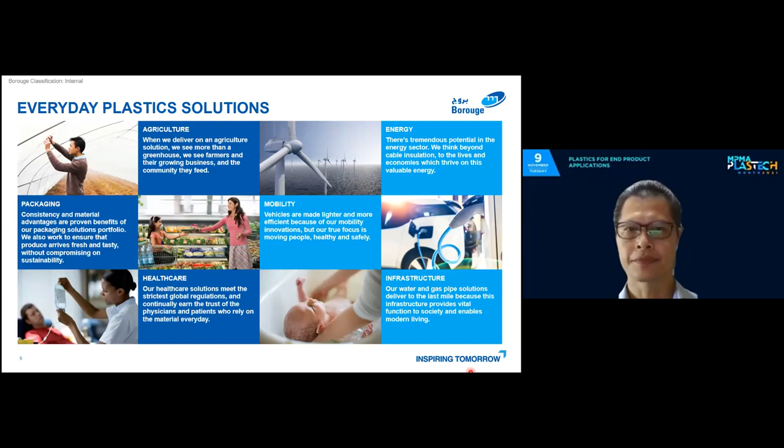For infrastructure, our business is divided into three subsections. Utilities, focusing on pressure, water, and gas. Construction, focusing on plumbing pipes for indoor application, and also soil and wastewater discharge, water harvesting facilities, as well as geomembrane for landfill and mining applications.

For industrial, it's typically larger diameter relating to refinery or oil and gas, with large diameter for seawater intake and outfall. These are steel pipes coated with polyethylene for transportation of oil and gas medium.

BorSafe is a family of pipe materials that we have. This is for pressure application - we have black as well as colored, ranging from medium density to high density. Today we focus on this PE100 thick wall application. This grade is designed for industrial, mining, and nuclear applications that require thick wall, large diameter pipe.

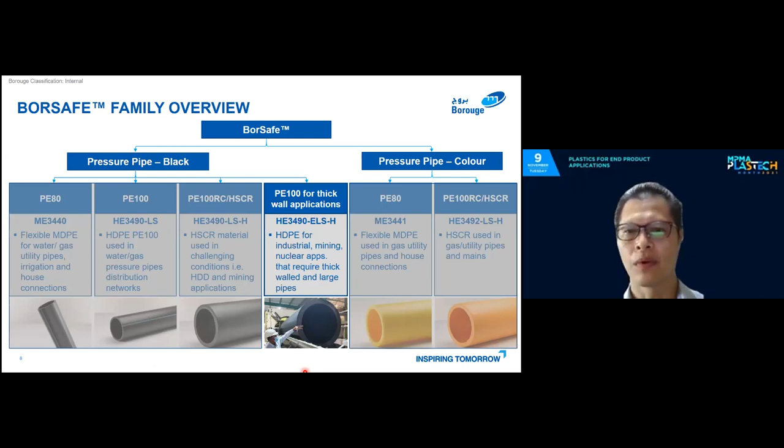What is large diameter? We are looking at more than 1200 mm, or thickness SDR 7 to SDR 9. This could amount to more than 95 mm wall thickness, so it could be PN 25 or less.

This is mostly for industrial use, because we are using this for water treatment and supply for mining, water transmission pipelines, and seawater intake and outfall for thermal plants, desalination plants, as well as nuclear plants. Because this pipeline is launched into the sea, flexibility is required during service.

All these projects are based on large project requirements, because you don't build refineries every day. This demand is also determined by local production capability - if it's possible to make locally, it will be much lower cost compared to shipping from another country. Maximum wall thickness of PE pipe that can be produced depends on combined factors such as machine and production capability, material property, as well as skill of the operators.

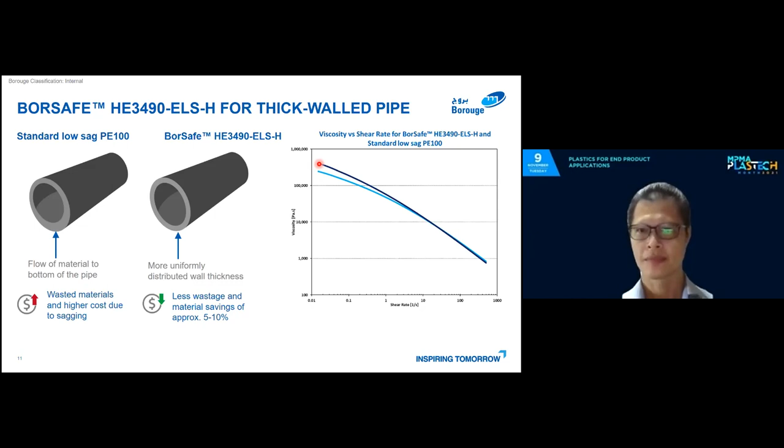Here is a trial that was done in the Middle East, with a size of 1600 mm, SDR of 17. According to ISO 4427, the wall thickness tolerance will be around 94.8 to 103.7 mm. With the standard PE100, after extrusion, you can see the wall thickness at the 4 to 7 o'clock position is already outside the tolerance prescribed in ISO 4427, more than 103.7 mm.

Under the same conditions, this ELS material has been extruded, and you can see that the wall thickness at 4 to 7 o'clock is less than 103 mm - it does not exceed the maximum tolerance provided in ISO 4427. Of course, you can see that some of them are still outside the range, less than 94.8. But achieving 94.8 is easier than having a high thickness and trying to reduce it to a smaller wall thickness.

So much for this introduction of this material. Look at this comparison of properties.

RCP is the rapid crack propagation. This is a property of the pipe when subject to high impact. The pipe will crack, so this material needs to withstand crack propagation and arrest it before it progresses further. It has the same performance as the standard PE100.

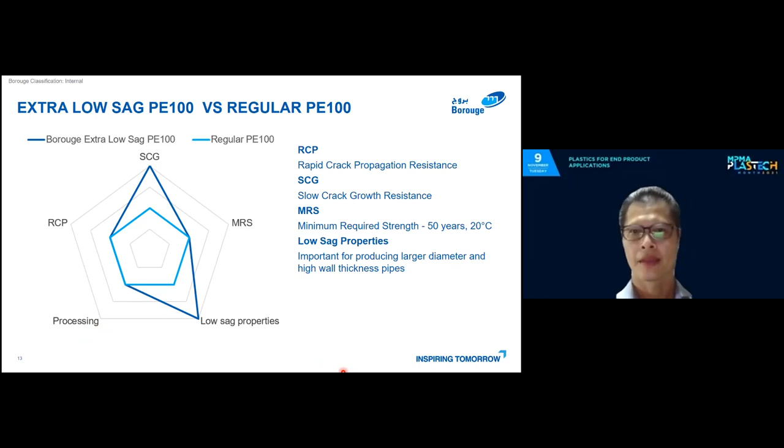Here is a schematic of grade recommendations for the sizes required. If we need 60 to 70 mm wall thickness, our standard PE100 3490 LS would be suitable. For anything more than 70 to 90, I would recommend LSH material. For anything more than 95 mm, the best in class would be ELSH.

This grade is made of bimodal technology with hexene monomer. The ease of processability, in addition to resistance of sagging, is through this improved viscosity MFR we have seen, with a more than 0.15 provision given in ISO 4427.

Again, I must stress that wall thickness capability changes per local production capability. That means if your machines locally are able to make this size, coupled with the raw material used and operator skill, a good large diameter thick wall pipe can be achieved.

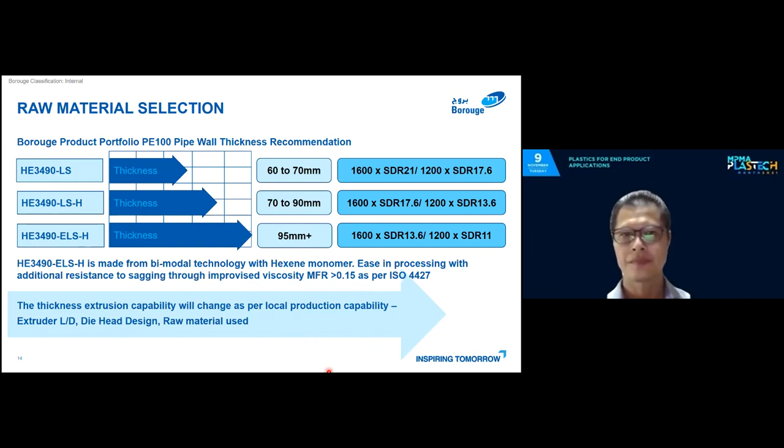Here we share some success stories. This is a success story in Egypt. The pipe manufacturer is Gulf Manufacturing Company, with a few projects: New Capital, port industrial, some desal plants, as well as irrigation waterworks. Pipe sizes range from 900 mm to 1600 mm, SDR 11 to 17, about thickness 81 to 94 mm.

The challenge was to find a PE100 material that allows production of this thick wall pipe in even wall thickness. With ELSH, they were able to realize the pipe dimension as well as a saving of 5 to 10% in material costs. There are some project photos for reference.

Next is Myanmar, in a copper mine. This application for pipe is for acid solvent transmission. As we know, mining requires a lot of acid to wash away material to extract whatever you want from the mine.

The pipe is produced by Chinaust, size 800 mm, SDR 11, about 74 mm thick. What they require is corrosion resistance against acid solvent, and PE100 is good against this kind of chemical resistance.

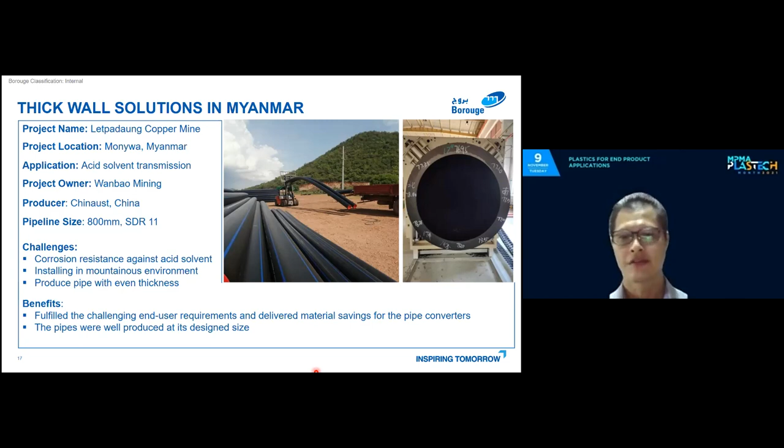The last example is in Vietnam. The producer is Thien Phong Plastic, in a province in the southeast of Ho Chi Minh City. The purpose is for seawater transportation into prawn farms.

Pipe sizes were 1200 to 1600 mm, SDR 11 to 17, wall thickness ranging from about 94 to 109 mm. What they need is a suitable PE100 material that can be made into even wall thickness, as well as corrosion resistance to seawater.

They need large seawater volume transported through harsh installation conditions, going through sand dunes, under the river, and then to the prawn farm. This ELSH, a durable pipeline with minimum maintenance cost, is able to support their operation of the prawn farm.

All right. So much for all the examples as well as the material introduction. Here I conclude. Development of this material and pipe extrusion technology have driven production of even larger pipes. Currently, they're even as large as 3.5 meters. And the success of the large diameter pipes has been proven in industrial application, as you've seen above. And provided operational pressures are not too high, PE100 can be cost effective for large diameter water transmission pipe when whole life costings are taken into consideration, including the maintenance of this pipe or leakage management.

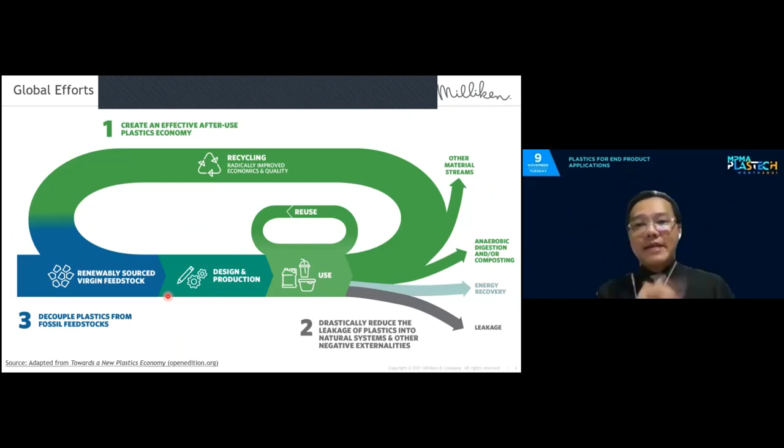If we step back on a macro level, this chart is common. This is the life cycle of plastics, especially packaging, but basically all plastics. It starts from production of the raw plastic pellets, then the design and molding of the final parts. This is where we are. We use and try to reuse as much as possible. Then at end of life, it either leaks away or we incinerate it, compost, and obviously we try to increase recycling. So these are the three main themes of sustainability in the polymer business. How can we increase recyclability and upcycling after use? Number two, how can we reduce leakage, whether to landfill or worse, to the water streams and the ocean?

And number three, how can we be decoupled from the fossil feedstocks? How can we use renewably sourced biomaterial? And these are the three main themes. But the theme of my talk today is really the often overlooked. What about the design and especially the production stage?

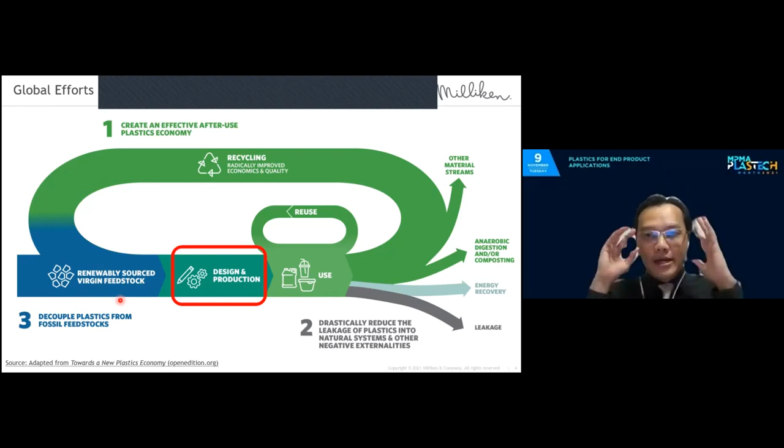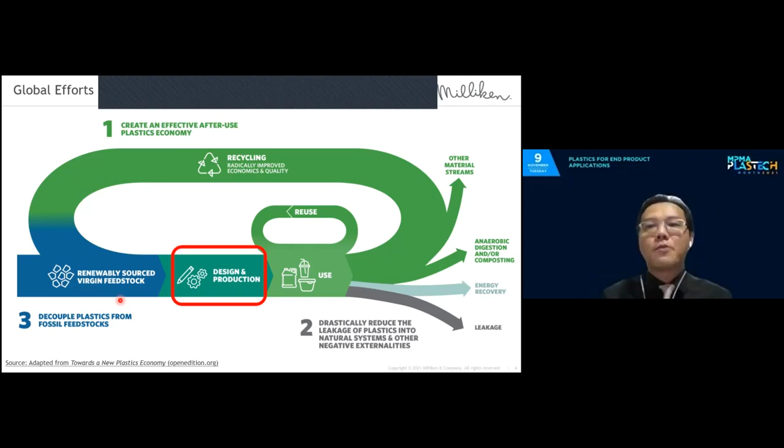And my talk will be about injection molding. What about optimizing the injection molding process to use as little energy as possible, to be as sustainable as possible? Sure, all of this needs to happen, but we do not forget small parts of the big cycle where we can also make an impact to increase the sustainability benefits.

So today we will be talking about three additive solutions from Milliken. Very quickly: our clarifying agent, Millad NX8000, our high-performance nucleating agent, Hyperform HPN, and also, like I mentioned, the very new DeltaMax impact modifiers. And let us look into it one by one.

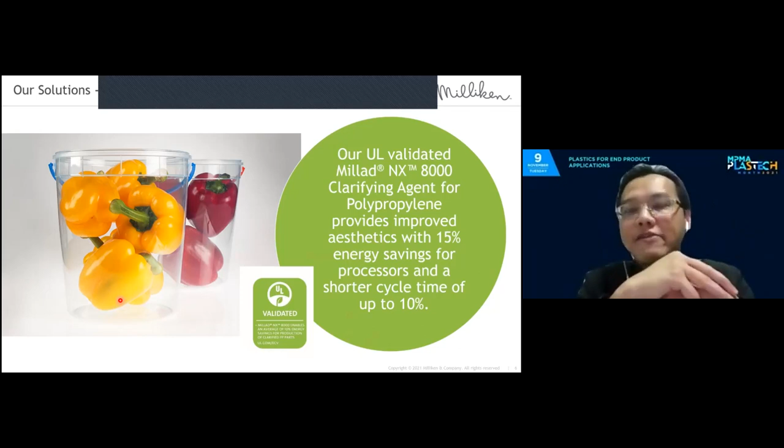NX8000, right? Right now, the most popular, most advanced clarifying agent for polypropylene, a lot of aesthetics improvement. But today we are really talking about how it can enable the optimization for the injection molders to save energy and to reduce the cycle time. So I have a 3-minute video, so please enjoy.

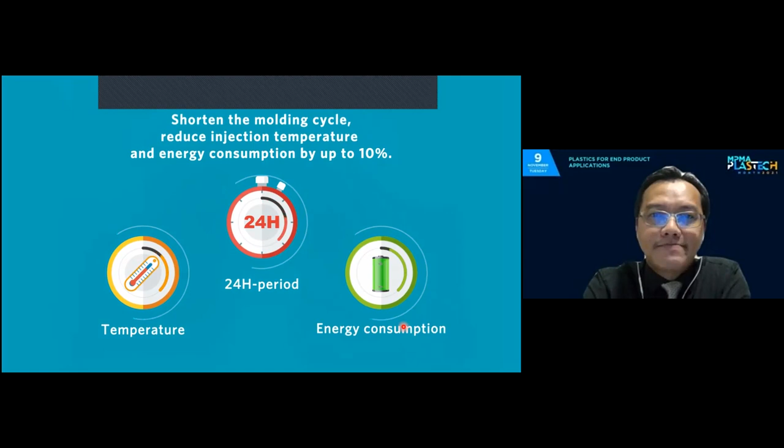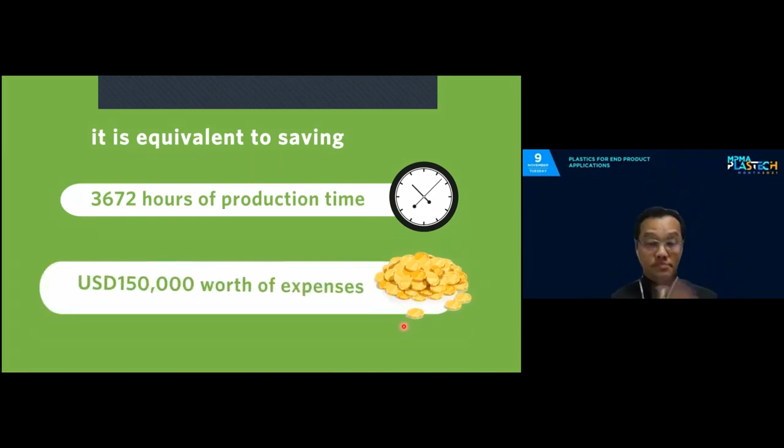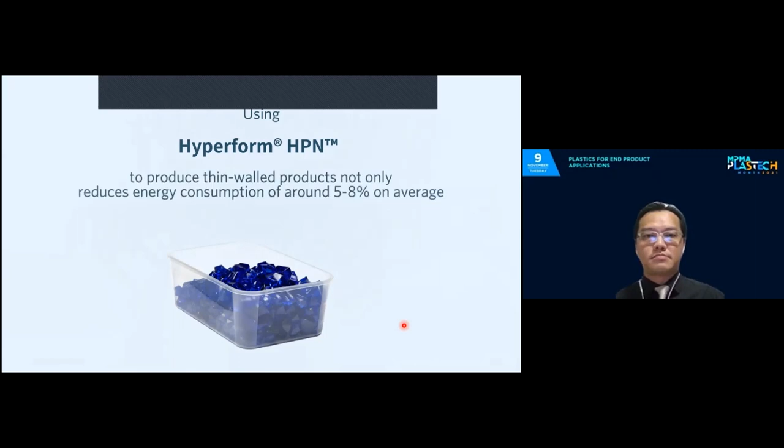Do you know? How to let PP be made at the source of production that is environmentally friendly, energy saving, and highly efficient is what we are constantly concerned about. Compared with traditional polypropylene clarifying agent, having Millad NX8000 clarifying agent in the injection molding process can effectively shorten the molding cycle, reduce injection temperature and energy consumption by up to 10%. Hyperform HPN not only has excellent energy-saving effects, but can even shorten the cycle time. Milliken products have been independently certified by UL. If we produce 1,000 tons of Millad NX8000 PP injection molding products, it is equivalent to saving 3,672 hours of production time, approximately $150,000, decreasing carbon dioxide emission by 11.8%. Similarly, Hyperform HPN for thin-walled products can reduce energy consumption around 5 to 8% on average. chemical.milliken.com.

Right. So I hope the video was clear enough, but let me quickly go through the technical fundamentals on how NX8000, the clarifier for polypropylene, enables this productivity increase. So traditional clarifiers, before NX8000 was introduced to the market maybe 10, 12 years ago, there was a dependency of haze, which is the optical performance, the transparency, versus the processing temperature or the injection melt temperature.

The traditional clarifiers have the drawback that they need high temperature to be able to work properly and therefore deliver the optical performance. If you try to reduce the processing temperature, reduce the heating to your extruder, then the parts will turn less and less transparent, and it does not meet the requirement, because the requirement of a clarified random copolymer is for the optical performance.

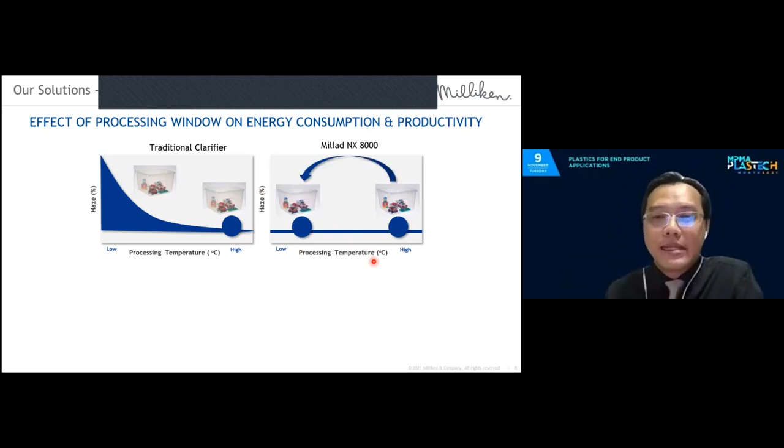But since we introduced Millad NX8000, it is insensitive, right? The haze, the optical performance is not sensitive to processing temperature. And therefore, whether you process it at a high temperature or a low temperature, it works fully, it functions properly. There is no degradation or there is no negative performance. And so we can translate that.

Traditionally, the industry used to have to process clarified random copolymer injection molding at high temperatures. And naturally, if you are molding it with high melt temperature, you would also need high cycle time. The hotter your melt, the more time you need to cool down in your mold before you can eject properly. And we try to symbolize the size of the bubble as a magnitude of the energy consumption used.

So by reducing the temperature, because now we do not have the roadblock, right? We do not have the bottleneck of needing high temperatures for the clarifying agent to work properly. Most of the time, we can also reduce the cycle time because, again, you are injecting a cooler melt. You now need less cooling in the mold before you can eject properly. And therefore, you can reduce both energy needed for heating of your extruder, as well as improve productivity, right?

Low cycle time, up to 10 to 15% productivity increase, which means that the energy needed to produce 1 kg or 1 part or 1 ton normalized will be even smaller. So productivity increase, faster outputs, more parts per machine, but also energy savings per part.

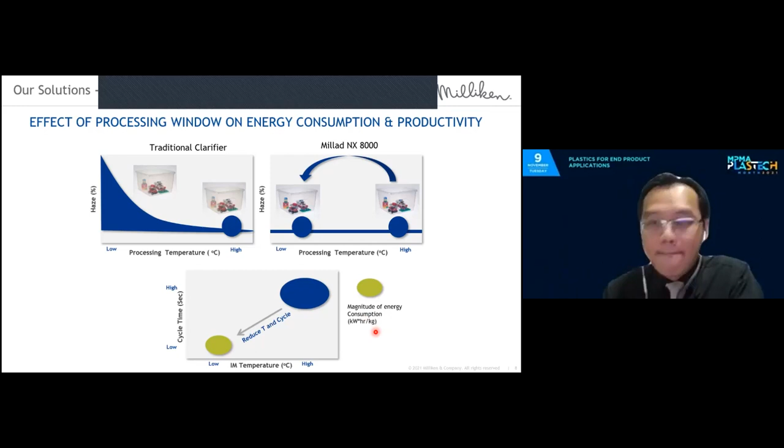Not just the overall haze or the overall transparency that you get the benefit from Millad NX8000, you also get less defects and no voids. Because if you try to use the traditional clarified random copolymer PP, especially when you try to reduce the injection temperature, like we say, it gets hazier, less transparent, and there is usually a higher risk and probability of defects, such as white streaks, white specks, and especially voids in certain parts of the plastics.

So voids are like, it's not an air bubble trap, but it looks like that, right? And especially now, a very close to home application of syringes in this COVID world, vaccination, voids in a syringe body are a no-no, right? To let the nurses and the doctors have full confidence that they are injecting it properly. You do not want them to mix up defects in the syringe barrel with air bubbles trapped in the medicine they are injecting. So really, not just energy savings, but a trouble-free, robust processing window, less defects when using NX8000.

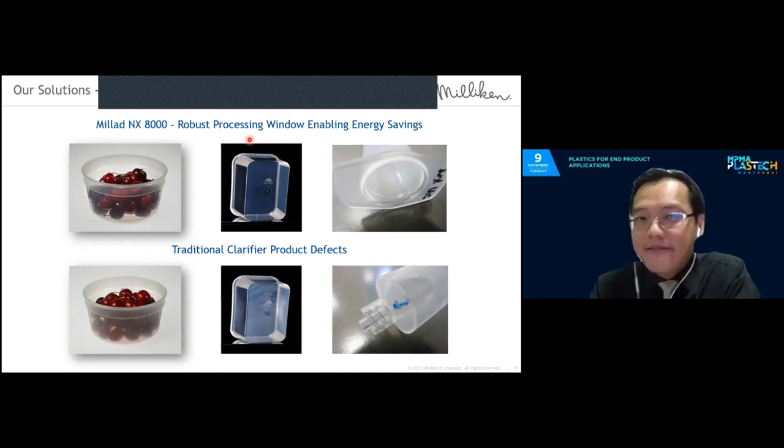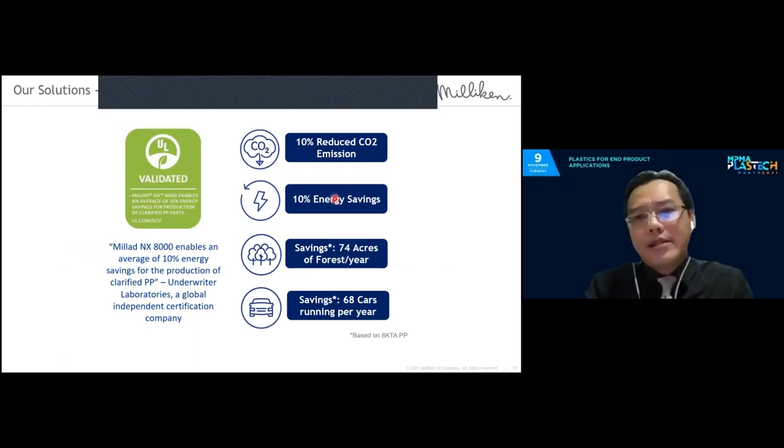So on average, we have talked and verified and been accredited by Underwriters Laboratory, the ECV, the environmental validation, as per the video. So on average, we are seeing a 10% energy savings reduction based on the concepts in the previous slide. And of course, you can equate that to more or less 10% reduced CO2. Because if you use less electricity, then you need less generation by the power plants, right?

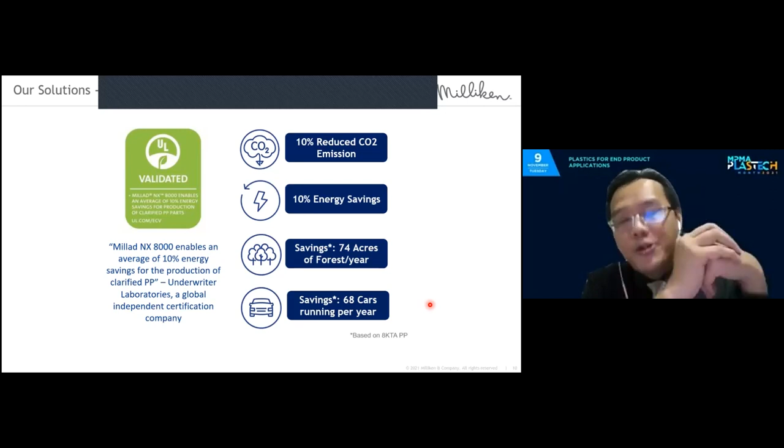And if we convert that CO2 equivalent, for example, let's just use 8,000 tons of polypropylene produced per year, then the 10% of CO2 is equivalent to 74 acres of carbon capture by forests, by trees, or let's say 68 cars per year of carbon dioxide emission, right? So if each injection molder can optimize 10% less energy use while still producing the same number of parts, that's a net win for sustainability globally as well.

And so obviously there have been a lot of trials in the past years, various different parts, as long as it is containing NX8000, especially for random copolymer, right? Be it pumps, closures, containers, or thin wall. So various regions, various types of machines. On average, a 10% reduction in cycle time, 7 to 25% in energy savings, electricity savings, and thus CO2 emissions. And you can put a green label as validated by UL on the parts and the brochures to educate the rest of the consumers and the industry.

But don't forget, if you calculate the dollars and cents, if you put in your energy costs, your overhead, your labor costs, your depreciation, and you put it all in, a 10% reduction in cycle time, with the productivity that it brings, can sometimes bring up to an average of $100 per metric ton processed of savings, right? And this is pure processing optimization. It's not about getting a cheaper material, but with NX8000 clarified RCP, optimizing the processing conditions alone gives you the dollar savings as well.

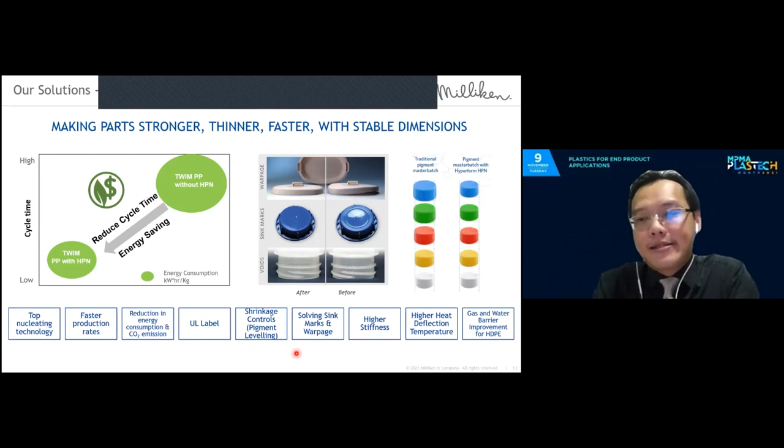This is what we were talking about today in terms of optimizing the processing conditions, but there is a bigger benefit, not just about the processing, not just about the cooling. I will not be going through all the other value propositions, all the other troubleshooting, all the other benefits that HPN Hyperform will bring. But these are just some of them, right? Warpage, sink marks, voids, pigment leveling, and many more that are common in polypropylene injection molding.

Moving on. So Deltamax is a very new-to-the-world technology, which part of it also helps in terms of optimizing the processing condition of an injection molding process. But to take a step back, we are focusing here on impact copolymer polypropylene or block copolymer polypropylene, right? For injection molding, it is always a case where the higher the MFR, the easier is your injection molding, wider window, especially if your parts are large or your flow paths are very long.

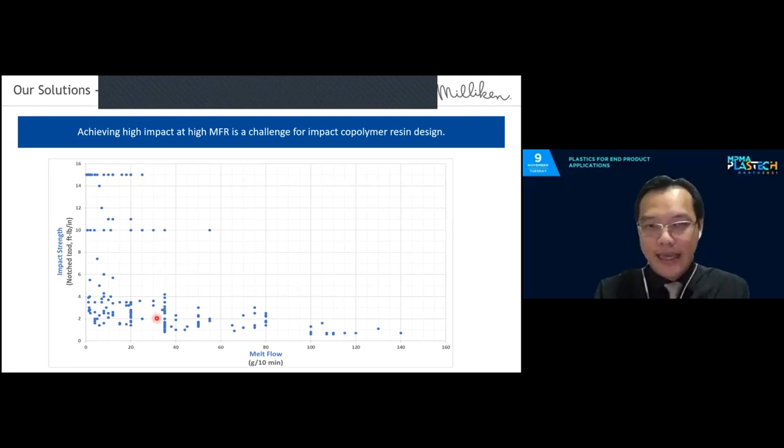But there is always that balance or the tension, right? If you have very high flow ICPs, most of the time you cannot have higher impact ICPs. And if you need high impact performance, you are usually limited to the melt flow that you can have. And this is where Deltamax comes into play to target the space where we can have both high MFR and higher impact strength. To be honest, even right now, you can meet this with solutions already available, for example, impact modifiers. But Deltamax is not just another impact modifier. It will manage your melt flow and impact strength at the same time without significant reduction of stiffness, which is the usual negative effect of putting too much impact modifier.

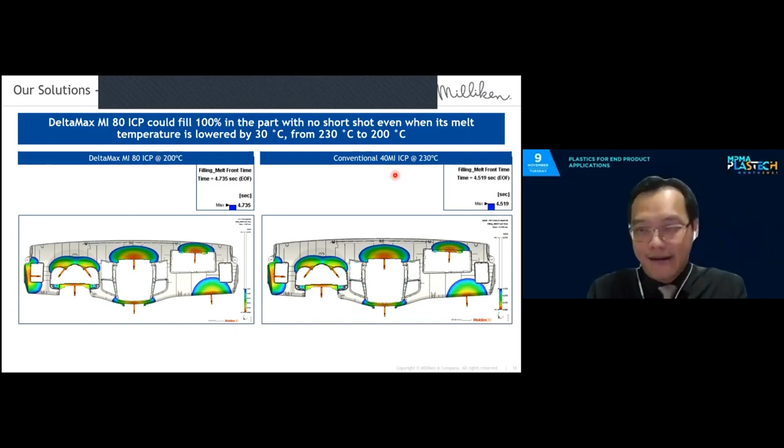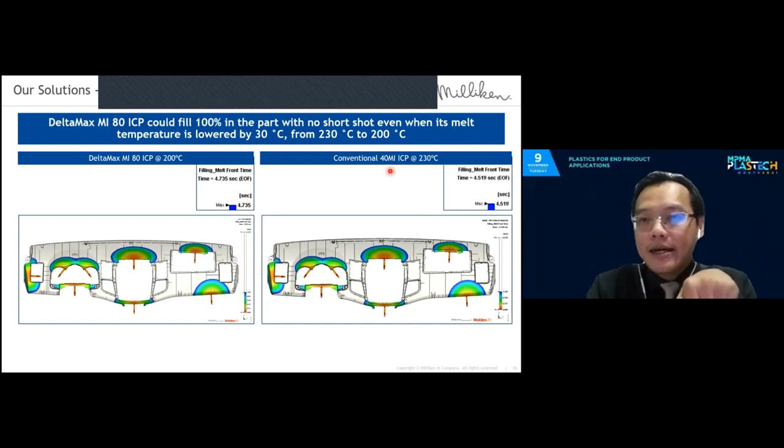And so this is a trial case, right? We worked with a customer and we developed this DeltaMax 80 MFR impact copolymer, which has similar impact performance compared to conventional 40 MFR ICPs. And we worked with Moldex3D and did some simulation. Of course, there are actual real mold trials, but in this simulation a 40 MFR control had to be injected at 230 degrees for this specific part that we chose, an automotive instrument panel. But because of the higher MFR, at similar acceptable impact performance, we were able to reduce the injection temperature down to 200 degrees. And you can see there's no problem with filling, similar filling times.

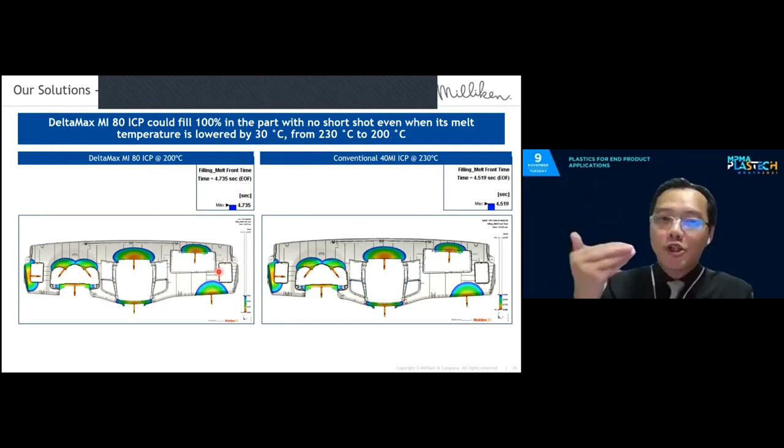Hi, I think Mr. Samuel's computer hanged. Dr. Fahmi? Yes, assuming so. I think his computer hanged. So maybe we can proceed to the next presenter, because I think there are just one or two slides left. He has three more slides to go. Okay, we'll move on to the next one. All right, thank you.

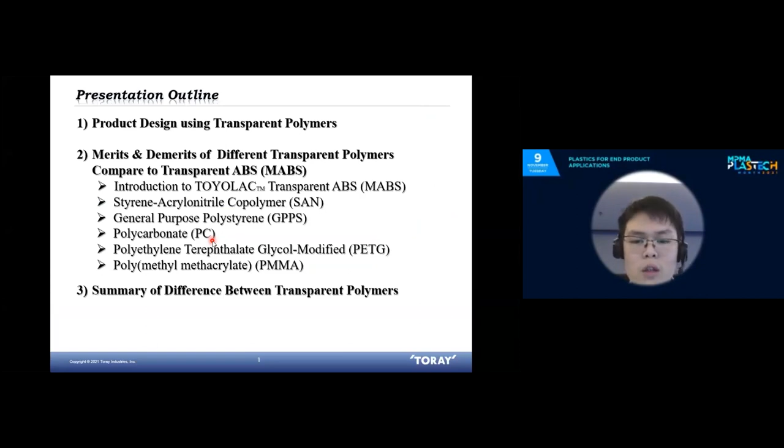With the advancement of technology, plastic has become an essential material used in our daily life. Among plastics, transparent plastic has become one of the common materials used for a lot of applications. So today I will compare transparent ABS with other common transparent polymers. Before we start, let me introduce our company. I come from Toray Plastics Malaysia, located in Penang. Our main business is manufacturing ABS resin, and transparent ABS is one of the grades produced by our company. We are mainly focusing on the polymerization and also the compounding process.

So we are the first company to start on the manufacturing of the transparent ABS, and we have already accumulated more than 40 years on this continuous polymerization technology.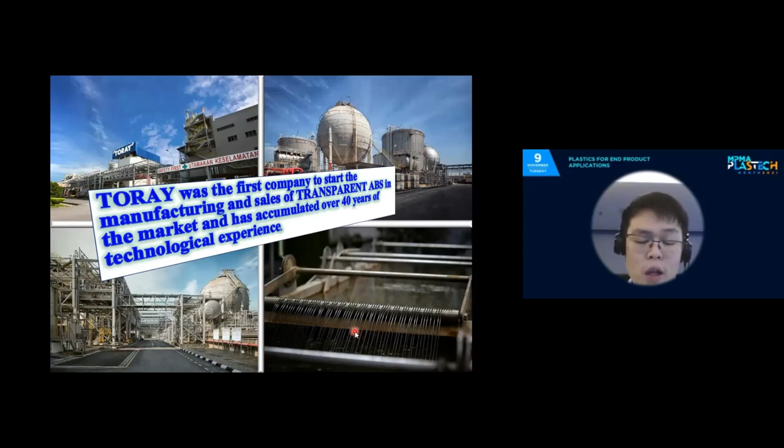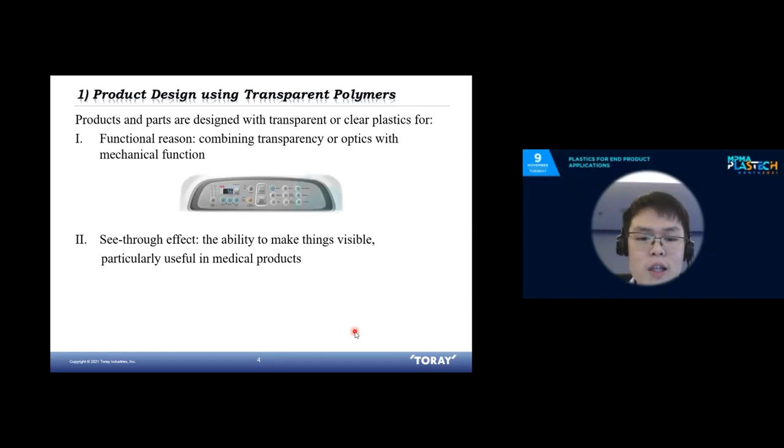So for the introduction, people are chasing a better lifestyle. So functional purpose has not become the sole aspect to be considered during product design. So visual appearance also becomes part of the details required during the design stage. So as you can see, one of the examples shown here. So this is the washing machine panel.

Transparent polymer has already become one of the choices to be applied, as shown in this photo here. So for the digital appearance, this one is to show people that this valve or even this kind of button can also be considered to use ABS, MABS.

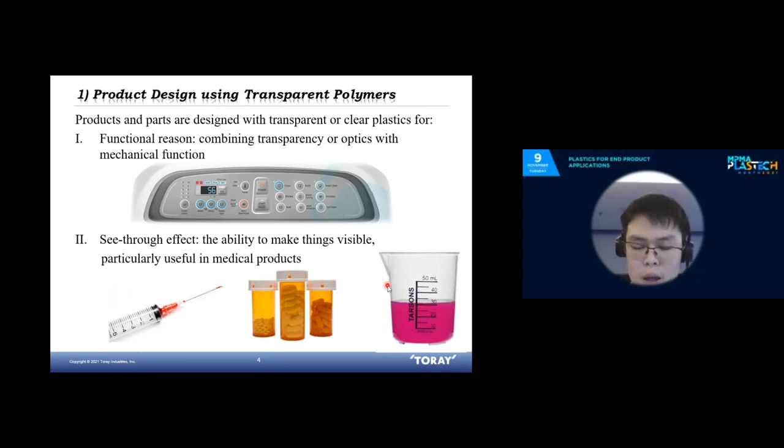Next, for the see-through effect, for the transparency, transparent polymer can also be considered for medical products such as the syringe and the container for medicine. Besides that, it can also be considered for beakers for our laboratory application.

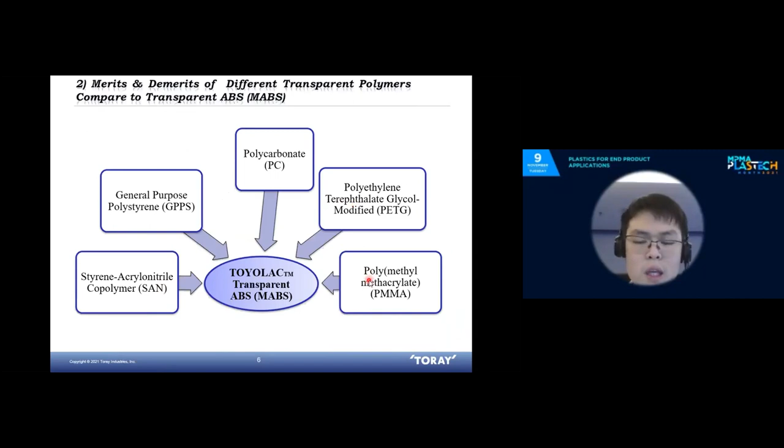And lastly, this transparent polymer can offer a lighter or tougher alternative to glass. So this is our introduction. So mainly today we will compare a few common transparent polymers, which are SAN, GPPS, PC, PETG, and also PMMA. So before we start, I will introduce what transparent ABS is.

So transparent ABS is actually the polymerization between four monomers. We start with methyl methacrylate, acrylonitrile, butadiene, and also styrene. So each of these monomers represents its own function. For example, acrylonitrile is more for chemical resistance. Another one, like styrene, is more for product rigidity. So mainly for what a certain application needs.

So through the polymerization, by controlling the rubber size or the matrix composition, we can control our finished goods' properties, such as high flow, high impact grade or high rigidity grade. So from here, through good compounding technology, our material is able to be enhanced to special grades such as scratch resistant, for applications like high class home appliances or audio appliances.

Even furthermore, through some additives, our material can also be enhanced to a chemical resistant grade, where certain additives help our material qualify for some medical device applications.

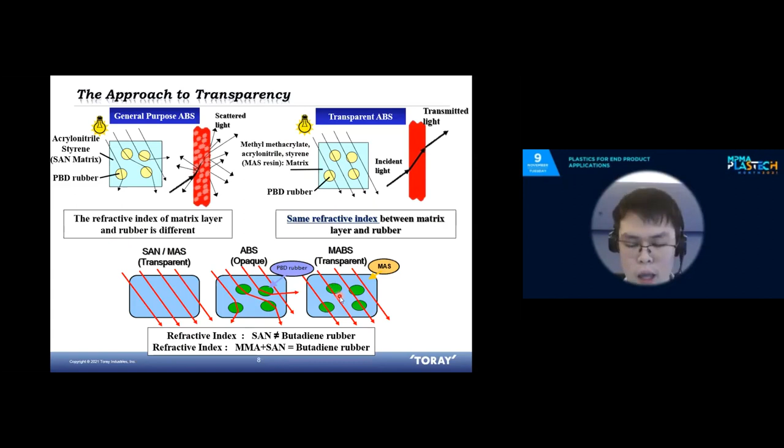So mainly this is the common material where light is able to transmit through the plastic, and then due to the PBD rubber, the light cannot pass through our resin. Next, by altering the AS matrix, the light is able to pass through again.

So mainly, like what I said just now, it is the polymerization between two different monomers. So we are able to control the ratio between both monomers. By altering the percentage of each monomer, we can create the required properties. For example, for acrylonitrile, if we further increase the percentage of this monomer, we are able to obtain a good chemical resistant grade.

SAN (styrene acrylonitrile) is suitable for applications such as disposable lighters, where we need resistance to chemical degradation. Overall, SAN has excellent dimensional stability, high rigidity, and good chemical resistance.

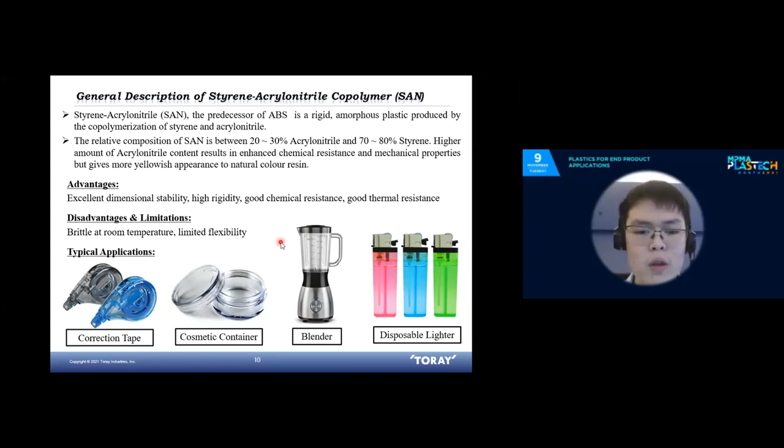But for changes from SAN, we know that E&E products are quite suitable for this replacement, and also for stationery due to the snap fit design. As you can see here...

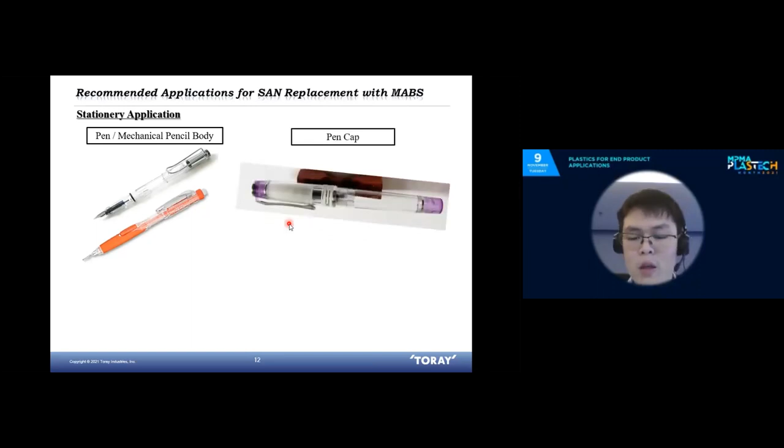We recommend changing to this pen or mechanical pencil body, and also for the cap. As you can see from this photo, this area requires frequent opening and pushing to close the cap. With the assistance of butadiene, which is the rubber, the parts will be more flexible and cracking issues will be less likely to happen.

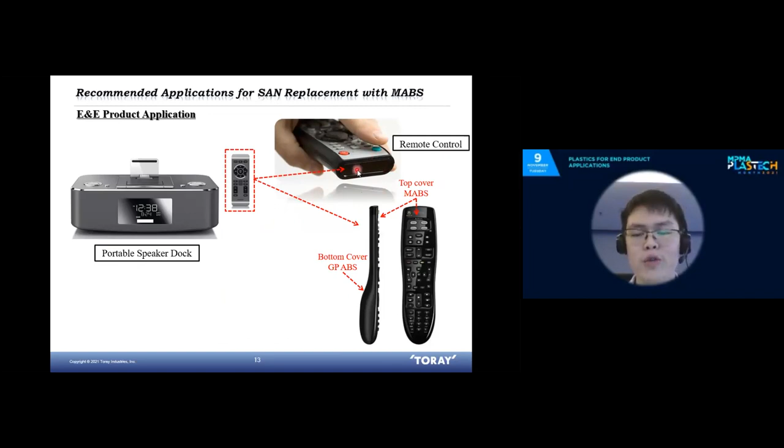Next will be E&E product applications such as remote controls. With MABS used, IR light is able to transmit through the plastic resin. This enhances the material's suitability for this kind of application because of the toughness. During assembly, cracking issues will also be less likely to happen. And during usage of the remote control, when it falls down, cracking will also be less likely to happen compared to using AS plastic.

Next, we will move on to general purpose polystyrene, GPPS. The main monomer of GPPS is styrene, which is also one of the monomers used in MABS. Polystyrene is one of the most commonly used commodity thermoplastic resins in our daily applications.

For this monomer, the main function is very high rigidity. It is quite dimensionally stable and has very good flow properties. Finally, it is quite cheap compared to other plastics. The disadvantage of this plastic is mainly similar to SAN, because lacking butadiene or rubber, it's quite brittle at room temperature and prone to stress cracking.

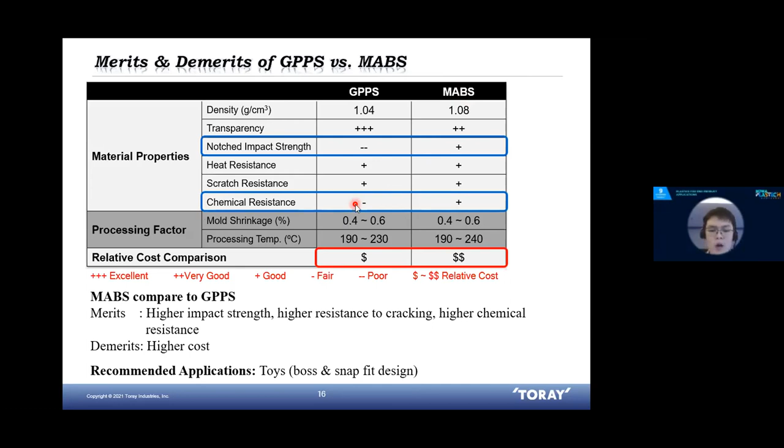As you can see, we will compare again these materials. For MABS, the impact resistance is slightly better compared to GPPS. With the acrylonitrile present in MABS, the chemical resistance is better compared to GPPS. In terms of what's better in GPPS, the cost is cheaper than MABS.

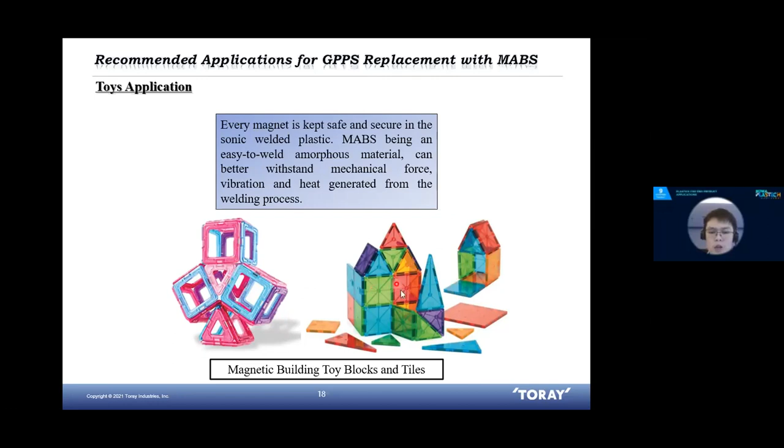Other than that, MABS, being an easy-to-weld amorphous material, can withstand mechanical force and vibration better, as well as the heat generated during the welding process.

Okay, so we'll move on to polycarbonate. Polycarbonate is one of the most widely used engineering thermoplastics in our current daily life. It can be naturally transparent due to its amorphous structure. This is the structure that PC has: bisphenol A plus a carbonate.

It's quite commonly used in applications such as luggage due to its high impact strength and high heat resistance. The disadvantage of PC is mainly due to poor chemical resistance and susceptibility to hydrolysis.

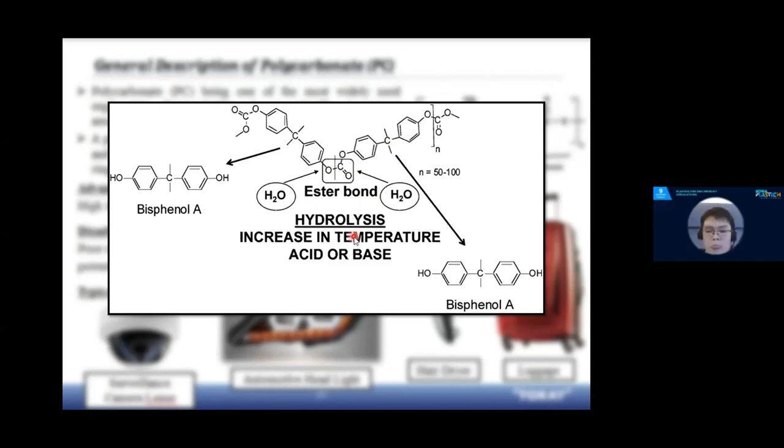So as you can see for the chemical bond, when high temperature and moisture is contained around the PC, the ester bond will easily break and cause the structure to become bisphenol A. So if this hydrolysis happens, the impact strength of this material will be slightly dropped compared to before the hydrolysis happened. So this is one of the disadvantages when PC is applied.

In terms of property, we can say that the impact strength and heat resistance for PC is quite good, actually very excellent, compared to MABS. However, on the MABS side, one highlight we found is that the density of MABS is lower than PC, so this means a part can use lesser material compared to PC. Next, on the chemical resistance side, MABS will be better compared to PC.

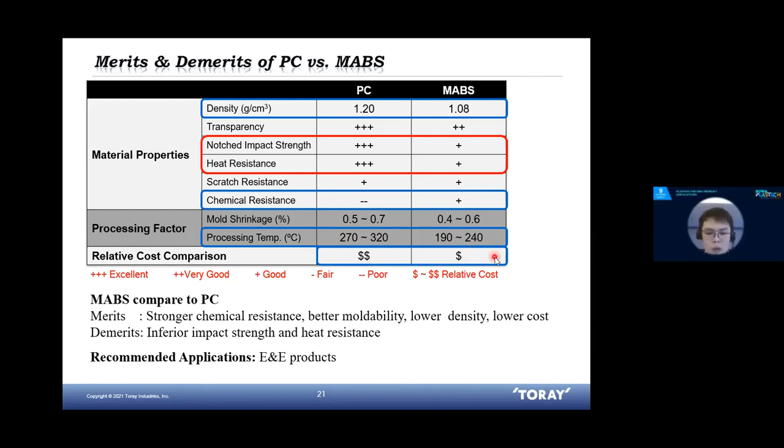In terms of processing temperature, MABS uses a lower temperature compared to PC. In other words, by using a lower temperature this also means energy saving compared to the PC grade. So for recommended applications for this PC replacement, one recommendation we tried is for E&E product applications, for the robotic vacuum cleaner.

Mainly for the display purpose and also for the infrared control to the remote control. And then next, for toy application, similar to complicated molded parts and also for light transmission to other parts.

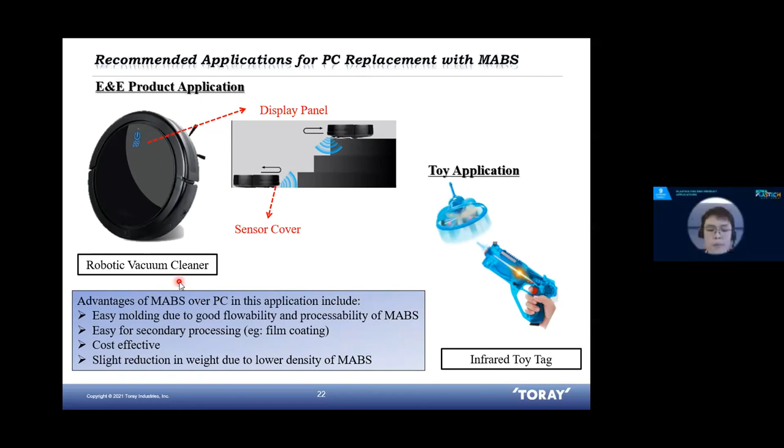So the advantage is more towards easier molding due to the good flowability and processability of MABS. MABS is also good for secondary processing such as film coating, and it is cheaper compared to the PC side. So we'll move on to the PETG.

PETG is commonly known as polyethylene terephthalate, the PET plus glycol. The glycol added is to remove the hazing effect seen during the heating of the plastic. The PET with glycol is able to stop the crystallization of PET at high temperature, which makes PET become opaque and brittle.

One advantage of PETG is very good chemical resistance to common materials such as soap or other cosmetic materials. The disadvantage of PETG is more towards high density and difficulty in the molding process.

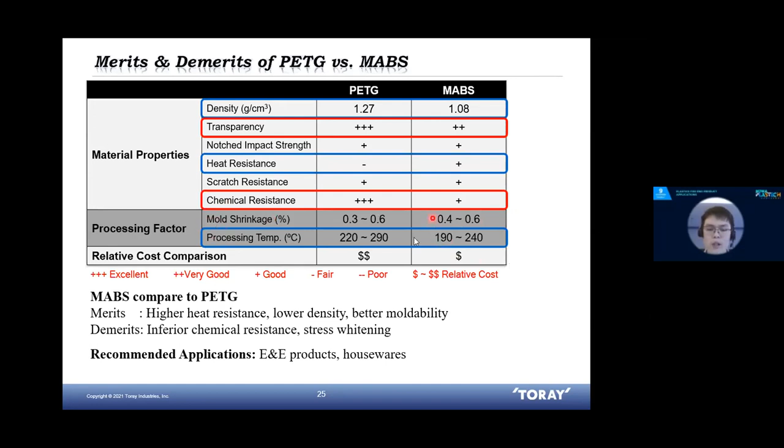In terms of properties comparison, for the MABS side, we can see the transparency will be slightly poorer than PETG, and the chemical resistance will be poorer. However, for density, similar to PC, MABS will be slightly lower compared to PETG. In terms of heat resistance, MABS will be slightly better, and comparing the processing temperature, MABS's processing temperature will be lower than PETG.

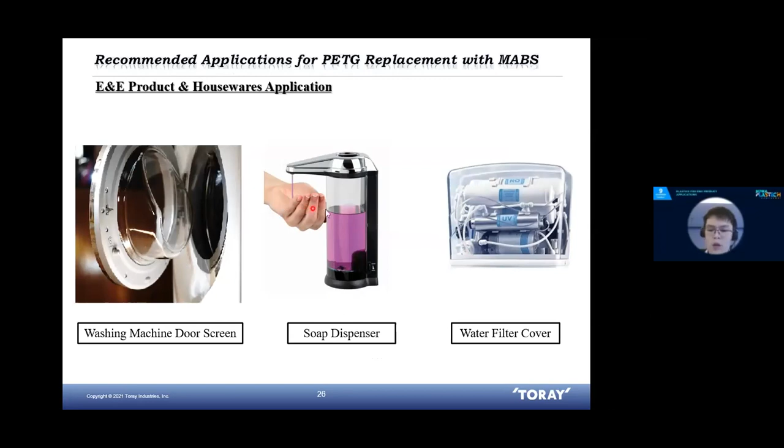We will move on to our last application, PMMA. PMMA is the most commercially important acrylic polymer due to its high transparency. This plastic only absorbs a very small amount of UV radiation, so it can have very good weather resistance during application.

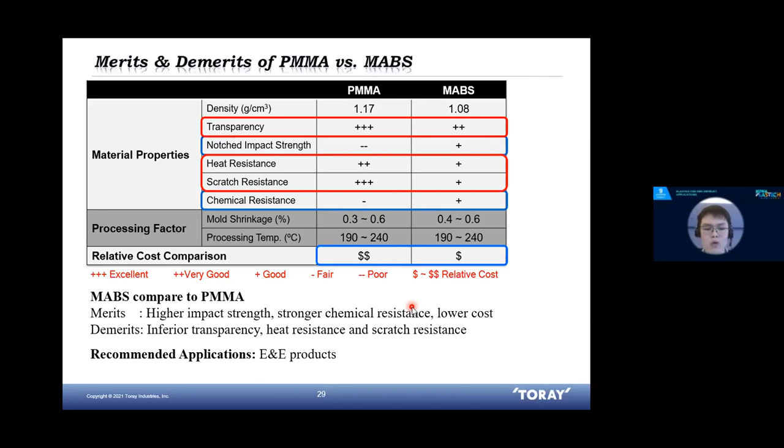In terms of property and performance, we can see that the transparency of PMMA is better, and the heat resistance and scratch resistance will be better than MABS. However, due to the polybutadiene, we can say the impact side will be better and it has much better chemical resistance compared to PMMA. The price will also be cheaper than PMMA.

So this is some recommendation for us to replace PMMA. One molding technology currently existing in our market is the film insert molding.

The advantage of this molding is the flexibility for us to change a model during the application. By using film insert molding, we only need to change the design of the front PET film, and then we can mold our MABS to the back of this PET film. So for the manufacturer side, there will be more flexibility to change their design for the same application, such as washing machine or air conditioner.

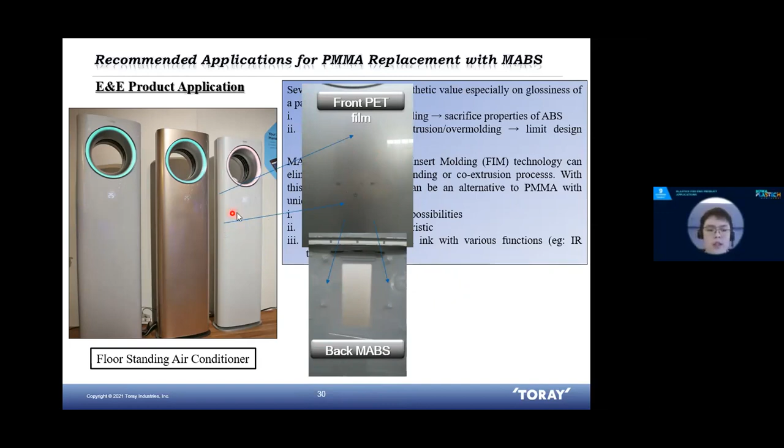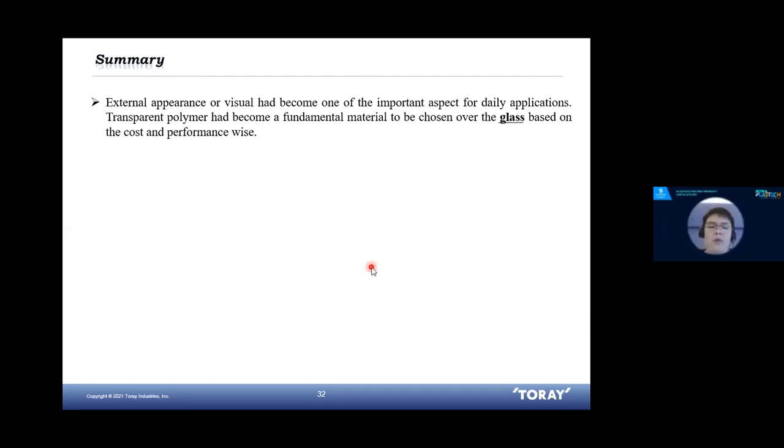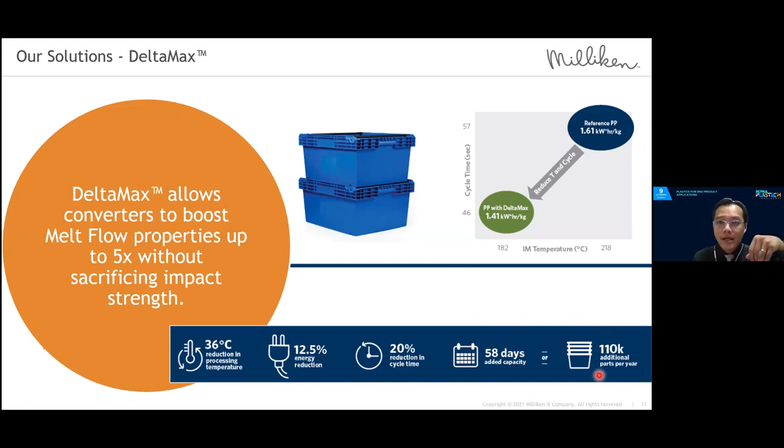One of the areas that we see could be interesting is upgrading the recycled impact copolymer polypropylene. DeltaMax is not only for recycled, but hey, recycled PP is still PP. If there is impact copolymer recycled in the stream, you can also use DeltaMax to improve the recycled stream, because whether it's pre-consumer or post-consumer, recycled stream generally has more variability in MFR and more variability in impact strength.

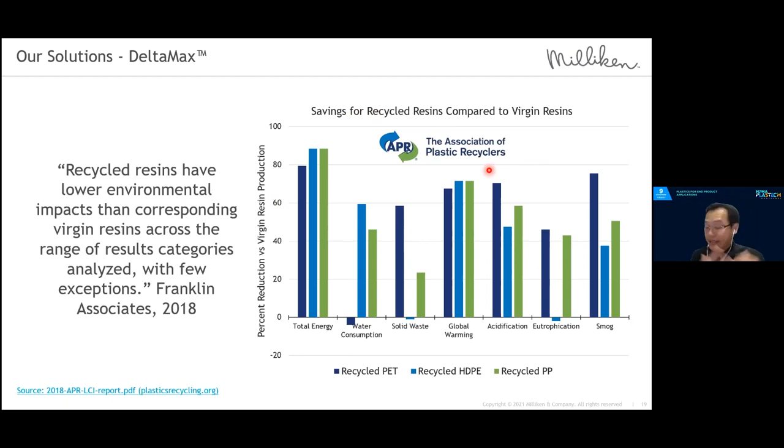If we can upgrade that, we can use it for easier processability of this variability in the incoming stream. Just some numbers here where if we compare recycled PET, recycled HDPE, recycled PP, the percent reduction versus virgin resin production - basically any recycle is usually better than virgin. So this is some of the data, and we participate in the Association of Plastic Recyclers. The challenge of using recycled is the variability of the incoming stream, and specialty additives like DeltaMax can help make it easier to use, and at the same time even optimize the processing of recycle itself.

And that's it, thanks for my additional 3-4 minutes. We've shared about the whole sustainability story, how we improve that in polymer processing. Let's not overlook the processing part. Today we introduced some specialty additives - clarifying agent, nucleating agent, and also performance modifiers from DeltaMax. That would really help optimize any of PP users, therefore improving energy consumption, productivity, and most important of all, enhance the sustainability benefits for our shared Earth. So thank you very much again, it was a pleasure to talk today.

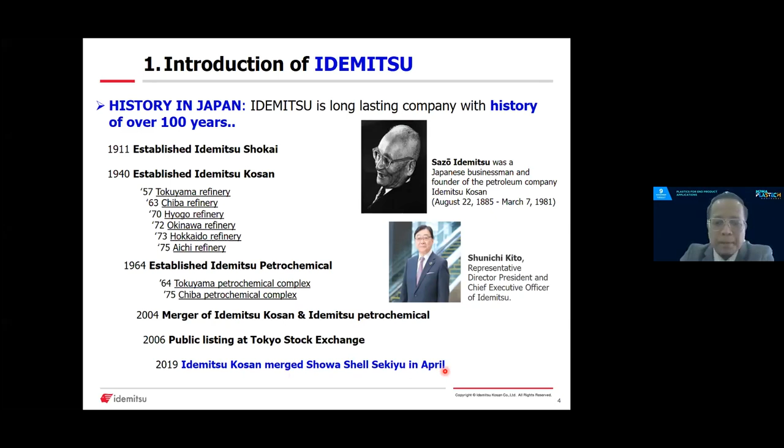So next, a brief introduction on the overall Idemitsu business. I think most of us know that Idemitsu is mainly producing lubricant, whereby we can see everywhere the so-called Apollo logos and the red colors everywhere. But actually, for information, we do have a few more businesses in Japan as well as overseas.

So we also have the petroleum and petrochemical businesses, which is oil refining, sales, petrochemical manufacturing, and basic chemicals. Resources business like crude oil exploration, coal mining, and functional material business as well. Electronic material, agriculture business, lubricant, I think everyone knows, and advanced material as well. Renewable energy, also we have a few more businesses in Japan.

So for today, we would like to share with ladies and gentlemen about our functional business, whereby we have a recent expansion in the Asia region to meet global demand. Okay. So next, a brief introduction of Idemitsu in Malaysia. I think most of you know that we have 5 companies, including a JV company with Petronas. We do have one JV company with PCE ethylene, which is polyethylene, whereby 12.5% of the JV is from Idemitsu.

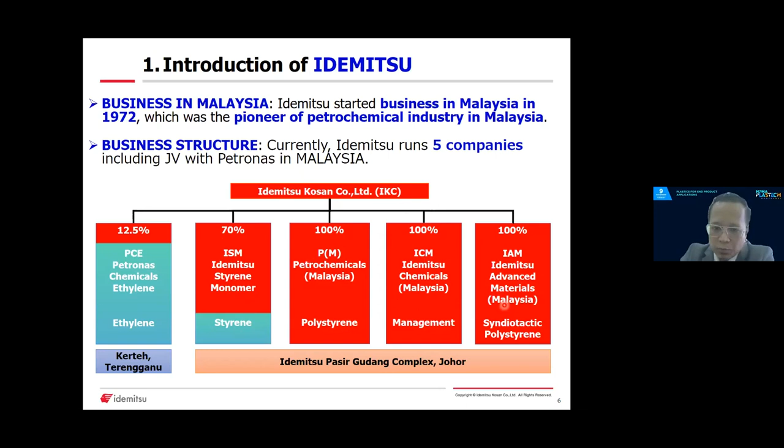And at the Pasir Gudang complex, we have mainly 4 companies, which is Idemitsu Styrene Monomer to produce styrene. And we have also PM, we call it Petrochemical Malaysia, which is producing polystyrene. ICM, Idemitsu Chemical, which is the management company, and also IAM, which was recently established in 2018. Later we'll explain a bit more about our projects. So a bit more, but I will not explain in detail.

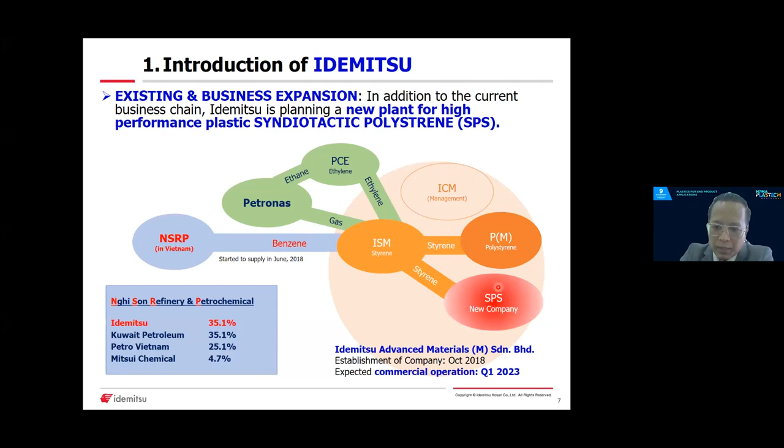Okay. Next, we would like to introduce our new project in Pasir Gudang. So as you can see here, our commercial operation will start from Q1 2023 onwards. We are located at Pasir Gudang, Johor. Later I will show more details about the plant, where it is. The plant itself is about 300 square meters, and our capacity will be 9,000 metric tons per annum. So like I said earlier, this is one of the products in the world. Okay. And our mechanical completion is tentatively set for September 22 next year.

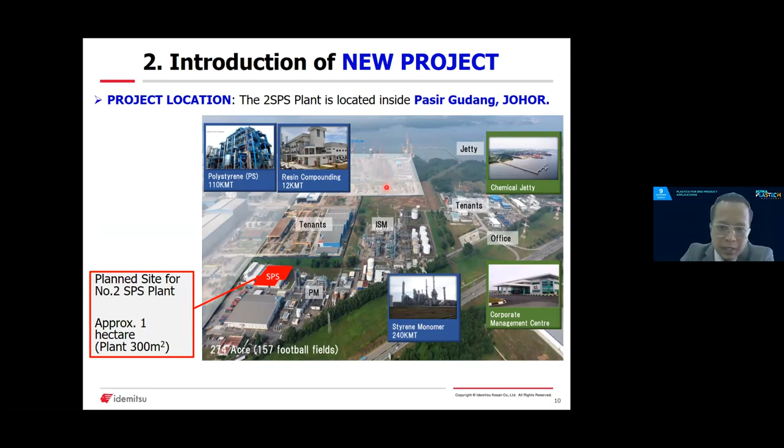Okay. So this is our plant at the Idemitsu complex at Pasir Gudang. You can see here we have 3 plants, and our future plant will be located here. Others are our nearby companies, whereby this is the MSC area, and also we have Sumitomo in the same Pasir Gudang complex.

Okay, now this is the most important part, where I would like to introduce our future products. We do have our plant in Japan, so this is the second plant producing by Idemitsu to meet global market demand. Okay, so what is SPS XAREC?

This is a combination of the metallocene catalyst with the styrene monomer. Styrene monomer is our main raw material, and we have a so-called metallocene catalyst, which gives flexibility to the structure of the crystallized polystyrene, SPS. Through this, it allows a variety of benzene ring arrangements. So as you can see, this is our future SPS pellet, and for information, it has been produced in Japan since 1985. Okay.

Short introduction. I think the experts know the difference between PS and SPS, whereby we have mainly 3 categories of PS. The one at the existing plant in Pasir Gudang we call polystyrene, conventional, and this is the SPS XAREC. So let's see the difference. You can see the chain of the polymer itself, we call it random or atactic, which has a low heat stability, about 100 degrees. And compare it to XAREC, as you can see the structure of the polymer itself.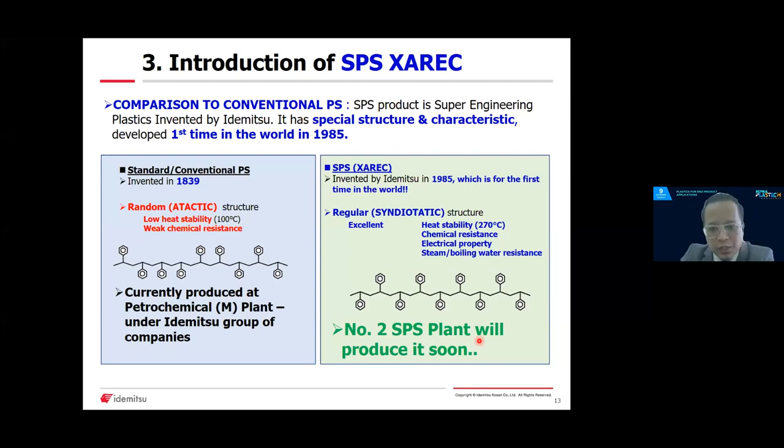So we have a regular so-called syndiotactic structure. This will allow heat stability up to about 270 degrees C, and also good chemical resistance and good electrical properties, as well as steam and boiling water resistance. We hope to start producing our first SPS from Malaysia starting from 2023.

Okay, so a bit more detail on the comparison with conventional PS. Through the regular 3D crystalline structure, it can reach the engineering plastic range, so we have more advantages with this new engineering resin. Through crystallization, which is one of our processes, it gains additional characteristics, as I explained earlier: better heat resistance, better chemical resistance, and better dimensional stability. This combination of three is quite excellent, giving more added value to SPS.

So this is a comparison of PS and SPS, as you can see here. This is the main comparison, while the others are maintained as they are in the SPS process. Okay. So I would like to share with the audience more detail on our XAREC features through our continuous R&D division lineup enhancement and high-end products. So we have a wide range of applications.

Due to the excellent properties of SPS, it can contribute to a lightweight resin, which is preferable for automotive wiring terminals, not deformed by soldering, as well as weight savings. It also has high insulating performance, so it can be used for high-voltage parts for automobiles. It stands up to high electricity and high voltage, with the highest insulation of all plastics. Other than that, radio waves pass through it easily, so it can be used for inter-vehicle radar as well as the smartphone we have in our hand now.

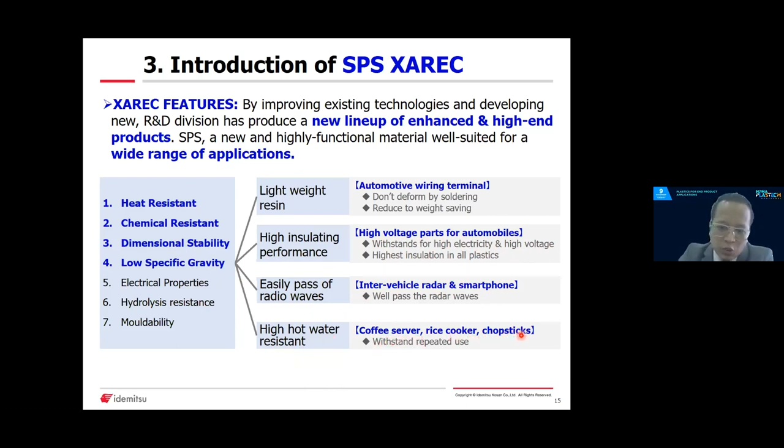In addition, due to these excellent properties, it also has high hot water resistance, so it can be used for coffee servers, rice cookers, chopsticks, and so on. Okay.

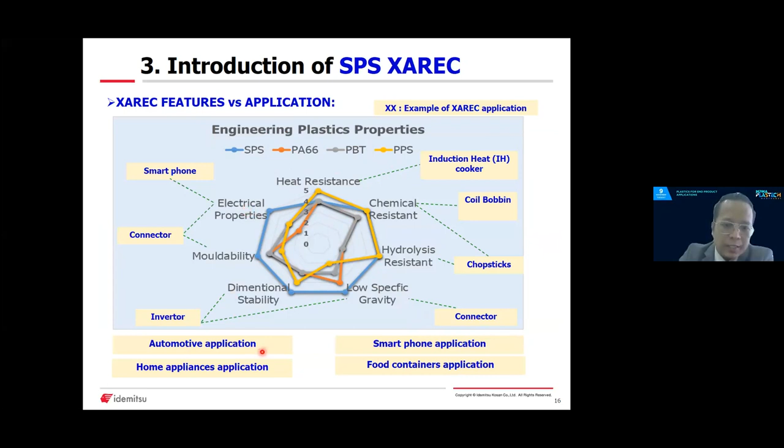This is a comparison with PA, PBT, and PPS, which are in the engineering plastic group. I believe each engineering plastic has its own advantages, based on the application the customer is going to use. As you can see in blue, which is SPS, we have more advantages compared to the others, which allows us to use it for various applications as I explained earlier. Okay.

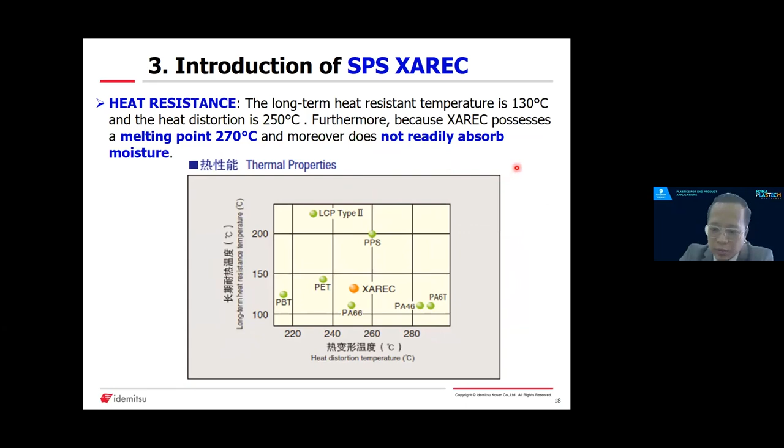This is one of the big advantages of SPS. It has a very low SG, specific gravity, which gives the advantage of reducing part weight. Okay. The second thing is heat resistance. As you can see, our melting point is around 270 degrees C, and moreover it does not readily absorb moisture. So this is one of the big advantages of SPS. There are a few more, but I will not explain them in detail.

It also has chemical resistance: high resistance to penetration by various types of acids and alkalis, and excellent durability towards oil and antifreeze. And hydrolysis resistance as well. Compared with polyester-based resins and PA, XAREC exhibits superior hydrolysis resistance, with properties close to PPS. Okay, and the last is dimensional stability. Since it has a small difference in mold shrinkage between the flow direction MD and TD, it exhibits good dimensional performance.

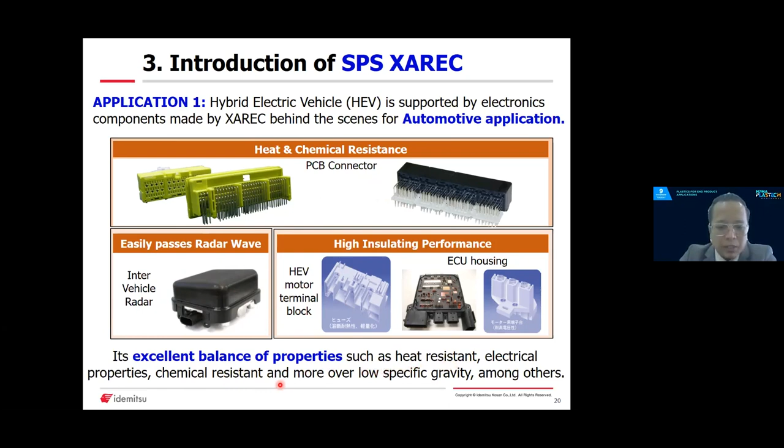Okay. So this makes it easier for the audience to understand our applications. As I said earlier, it has heat and chemical resistance as well as lower specific gravity, which allows light items. It can also be used for PCB connectors, mainly used nowadays in HEVs, hybrid electric vehicles, for automotive applications. Various parts are used by our customers, like inter-vehicle radar in the car, HEV motor terminal blocks, ECU housings, and so on. This is an excellent balance of properties such as heat resistance, electrical properties, chemical resistance, and moreover low specific gravity, among others.

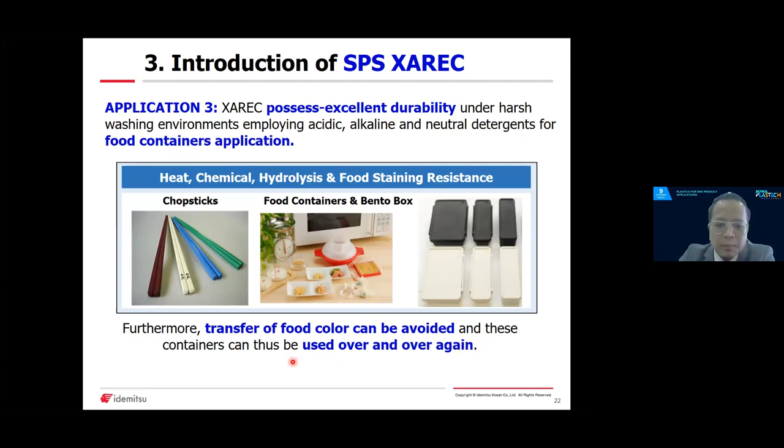And the last application that we would like to share with the audience is the smartphone application. Xarec is suitable for high frequency components. It has stable electrical properties as well as high radio wave transmission. As you can see here, it's been used for next generation smartphones.

If you have a phone, you can see this line. This actually has a purpose whereby it allows radio wave transmission for our smartphone. Due to this, Xarec's good advantage is its electric properties, which are close to those of fluororesin in terms of low dissipation factor and dielectric constant.

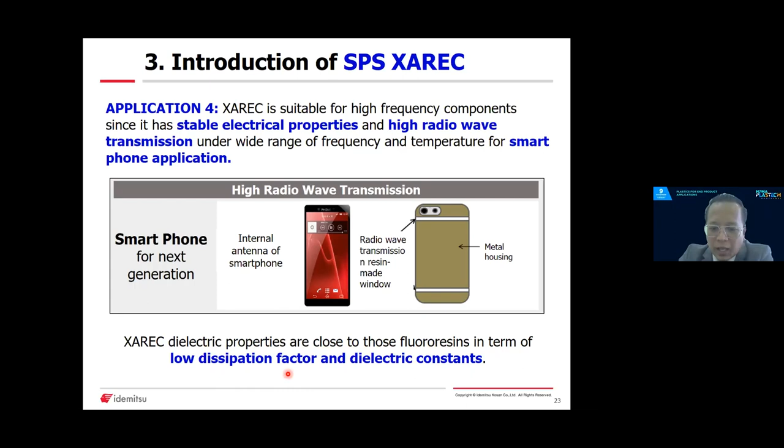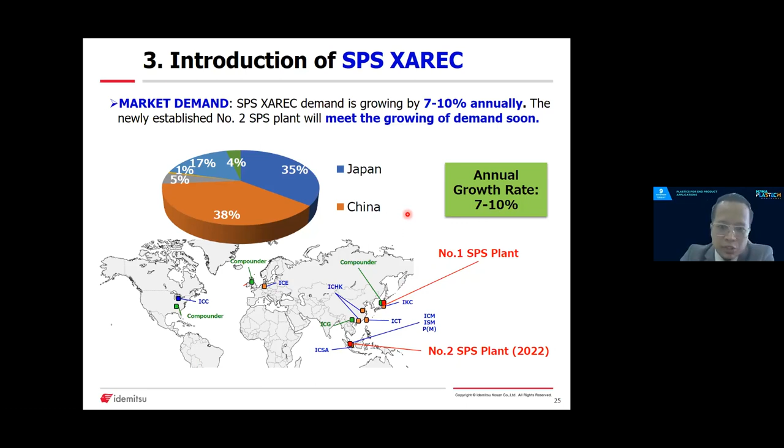I think this is my last slide. Just to share with ladies and gentlemen that we have a big market demand growing well, estimated about 7 to 10% annually. Our compounding companies and customers are around the world, in Europe, US, China, as well as in Japan. With the big growth of the market demand, it gives us more confidence to expand our plant in Malaysia.

In summary, because Xarec boasts remarkable heat and chemical resistance, as well as superior dimensional stability, it is a preferred SPS in many fields, like I said earlier. Second, Xarec has been endorsed by the automobile industry for use in critical electrical parts and components, through collaborative effort with major end users. They are quite well-known companies, if I may say.

Last but not least, number 3, Xarec is often applied to lead-free reflow soldering to comply with the current environment, whereby we are environmentally friendly products. Through this combination of 3 advantages, this could make us the first choice for many of our customers. I think that's all my presentation. Thank you very much.

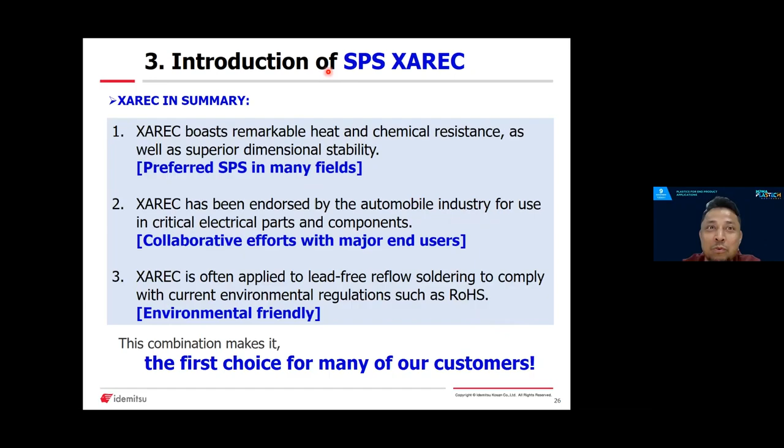Thank you, Mr. Nazri. This SPS topic actually reminds me of polymer chemistry that I studied at USM 20 years ago. You know, polymerization, additives, catalysts, polymer backbone. In this case, I believe it's the wonderful work of the catalyst that led to the discovery of a new material, SPS. Now we will go ahead and take some time for questions.

Quick question to Mr. Amos from Mr. Lai, together with Mr. Wong. Any price difference between HE3490 LS and HE3490 ELS? And is HE3490 ELSH on the PE 100 plus association list? Mr. Amos. Hi, Mr. Amos? Yeah, I'm here.

Yes, there is a price difference between the LS and the ELSH. I don't have the detail, but if you need more information, I can refer you to my sales manager, who is able to provide you the pricing difference. And for the PE 100 plus association listing, because this material is newly launched, the PE 100 plus association needs 2 test rounds to evaluate the material before they list it on their website.

This is estimated to be end 2022, because we need to submit all the documentation of the tests, and then they will kickstart the sampling and do the testing in their laboratory. Okay. It's also asking whether 3490 ELSH has similar performance to LSH. I think you answered it. Another question, does HE3490 LSH have low sag properties? Okay, for this LSH, if you don't mind me, I'll reshare this particular slide.

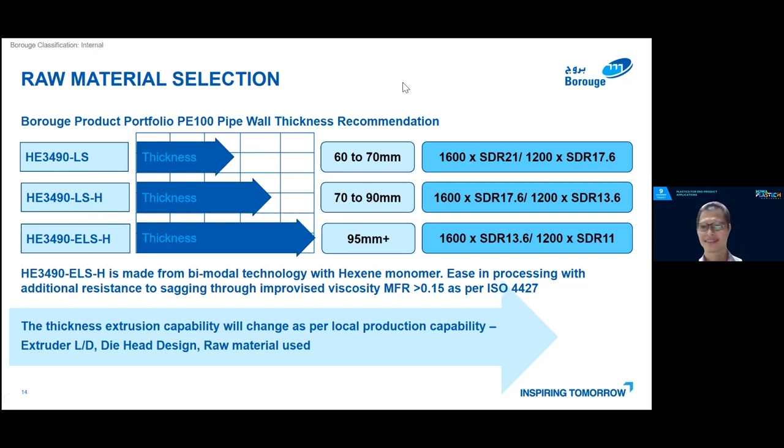Thank you, I think it's very clear on the sagging. Okay, thank you, Mr. Amos. This question is from Prakash to Mr. Samuel: Millad can be used only for thin wall parts and only PP materials? Yes, Millad is only used for clear polypropylene. But it is not restricted to thin wall. Any part thickness is possible, but yes, it is for clarification of polypropylene.

Okay, another quick question, Delta Max. It's also on you, right? Is it only applicable for PP or also other polymers? Unfortunately, it is also only applicable to polypropylene. Okay, thank you, Mr. Samuel. All right, Mr. Eric, a couple of questions for you.

The first question: one issue with MABS we face with customers is discoloration. This is due to butadiene oxidation, correct? Are there any ways to reduce or solve this problem? Yes, the discoloration is mainly due to the oxidation of the butadiene. We can offer a higher UV resistant grade for this issue. Another recommendation is that you may try a lower AN content grade for your application.